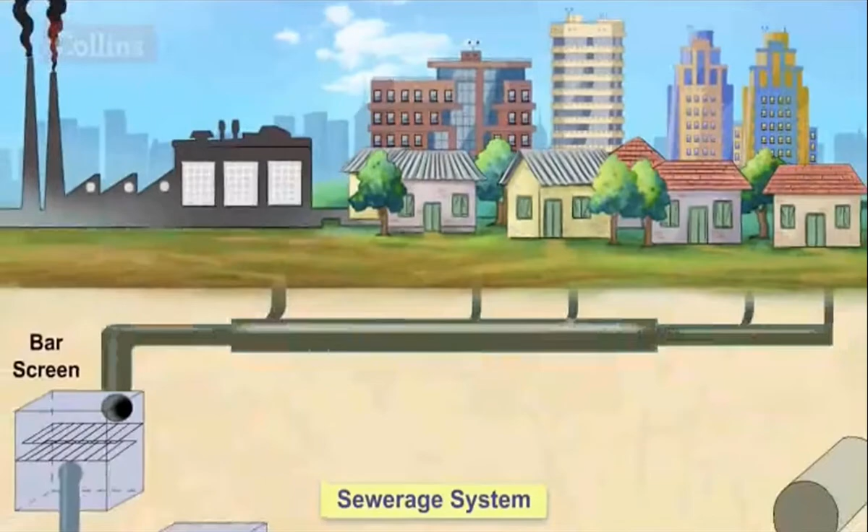Cities and towns have sewerage systems in place to carry wastewater from our homes, hotels, factories, and other establishments to a sewerage treatment plant where the wastewater is treated. It is then deemed safe to release into other water sources. The treatment of wastewater goes through different stages. Wastewater is treated to remove the physical, chemical, and biological contaminants present in it through various processes.

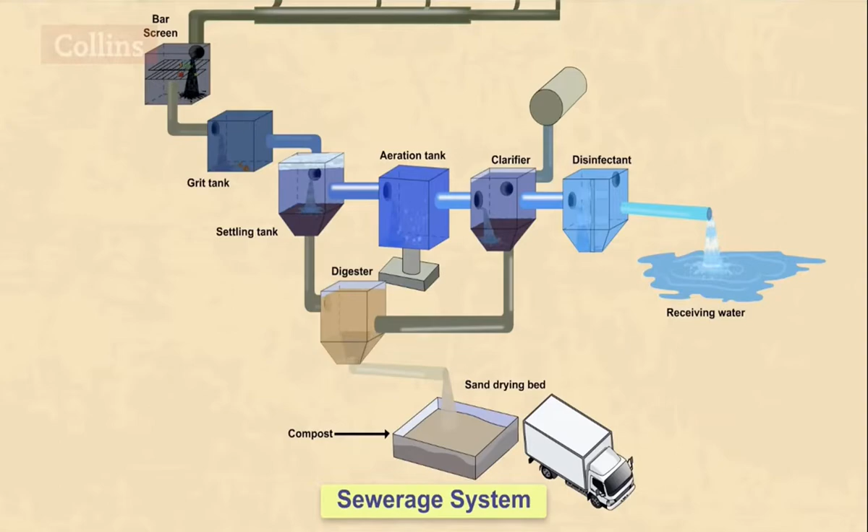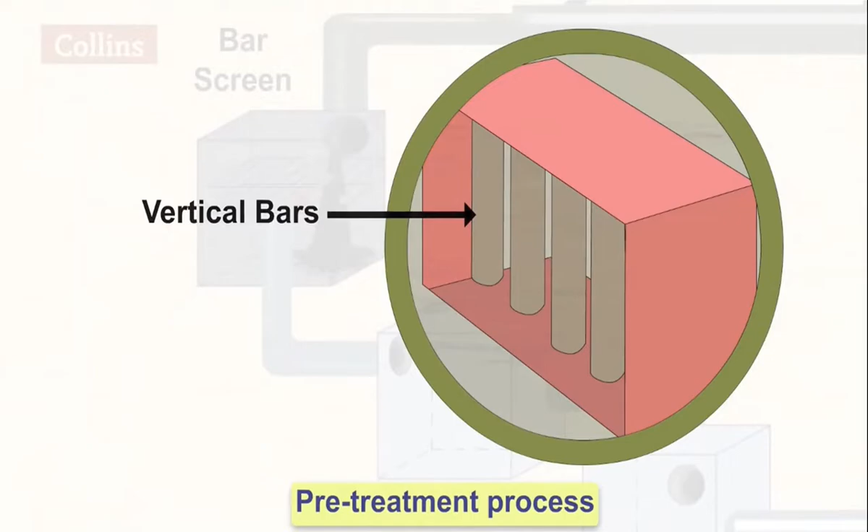The pre-treatment process involves the sewage being sent through grids or vertical bars that can remove large solid substances like metal cans, paper, and plastic materials.

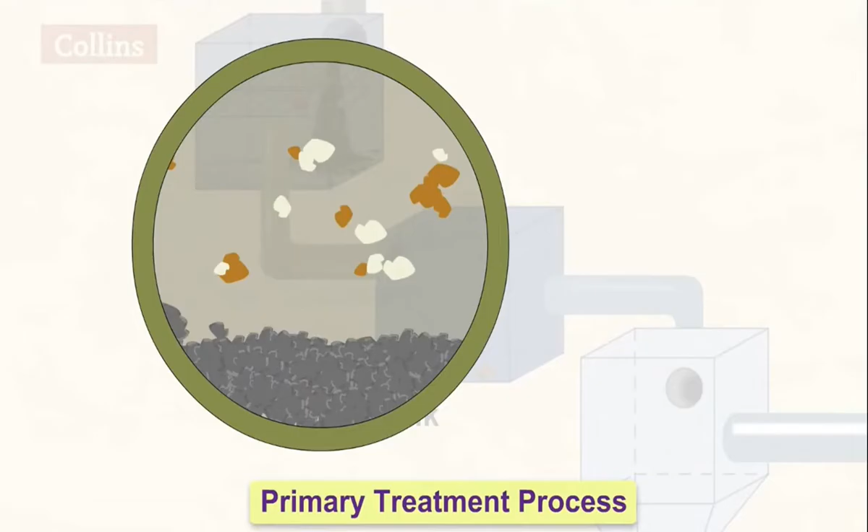In the primary treatment process, the sewage flows through the grit chamber very slowly so that the sand, pebbles, and soil settle down at the bottom. The sewage flows into the settling tank or sedimentation tank, where solid wastes like feces are allowed to settle down. Wastes such as soaps, oils, and grease rise to the top of the wastewater.

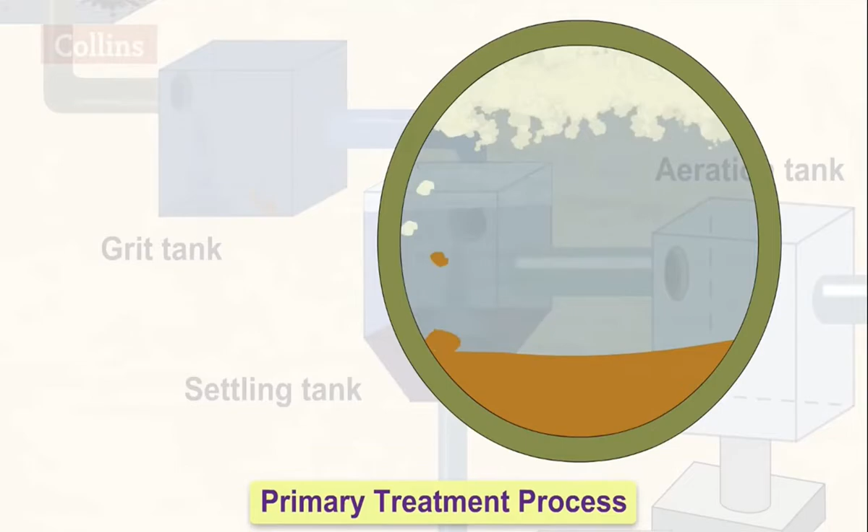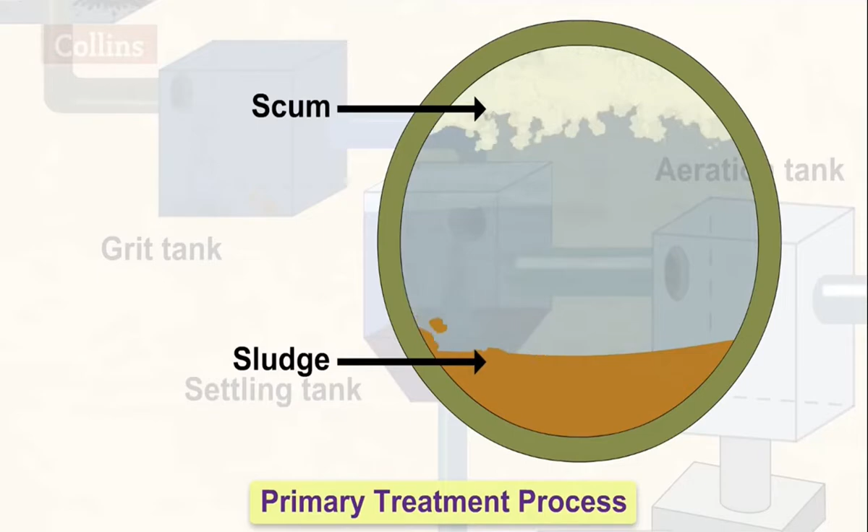The waste material that settles down at the bottom is called the sludge, and the floatable material is called the scum. Scum is then removed using a skimmer, and sludge is removed with a scraper every few days. The water that is left out is called the clarified water.

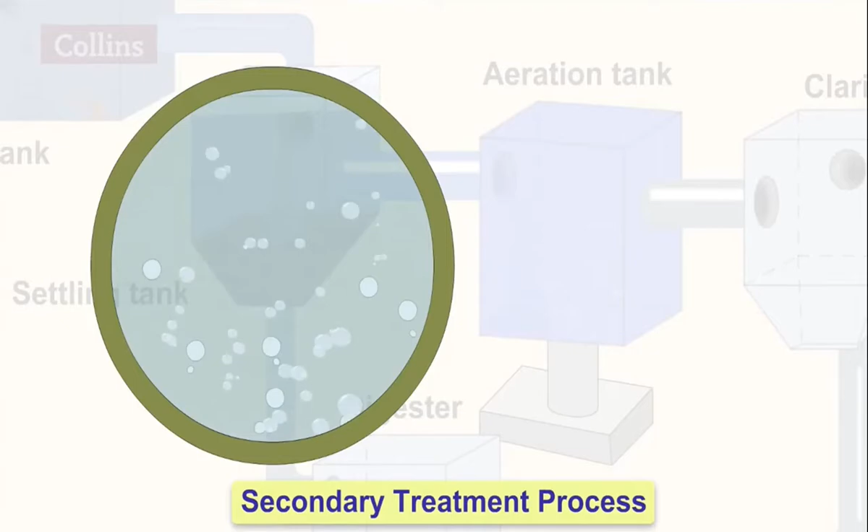In the secondary treatment process, biological or organic wastes are removed. It is a biological process. This is done by transferring the clarified water into an aeration tank, where air blowers bubble air, which helps aerobic bacteria to grow and feed on the organic contaminants, such as food waste, feces, and other organisms.

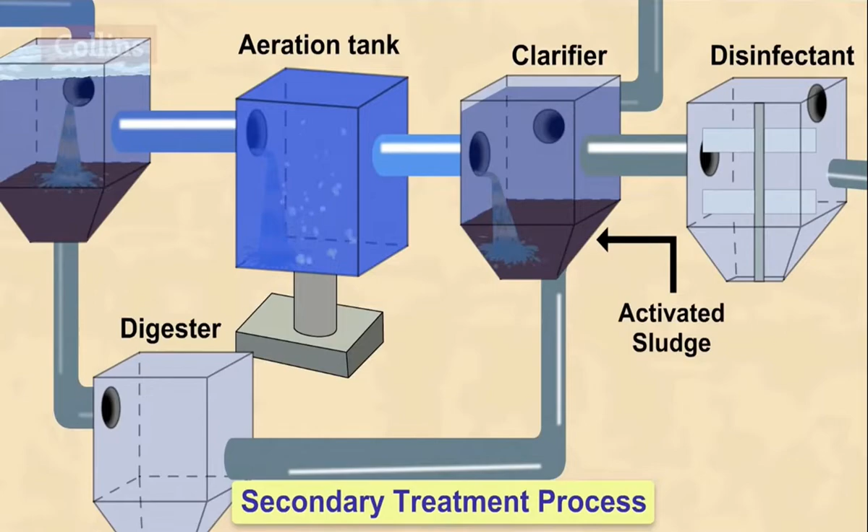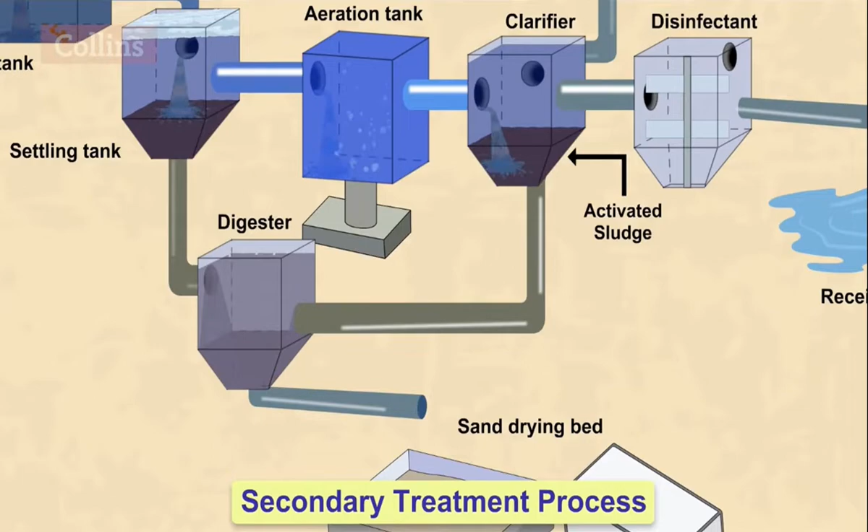The mixture then flows from the aeration tank into the clarifier, where activated sludge settles out by gravity. The activated sludge so produced, along with the sludge produced in the primary process, is transferred to the digester, where it is decomposed by anaerobic bacteria. Biogas is produced in this process, which can be used as fuel or to produce electricity.

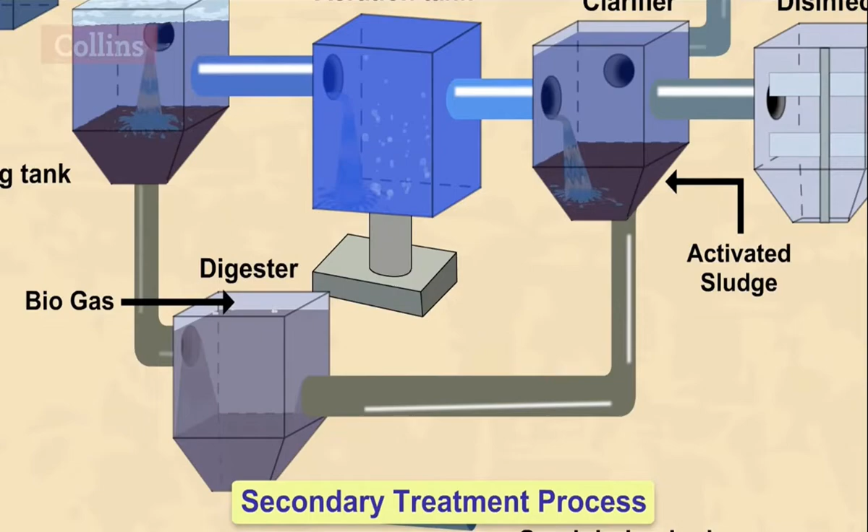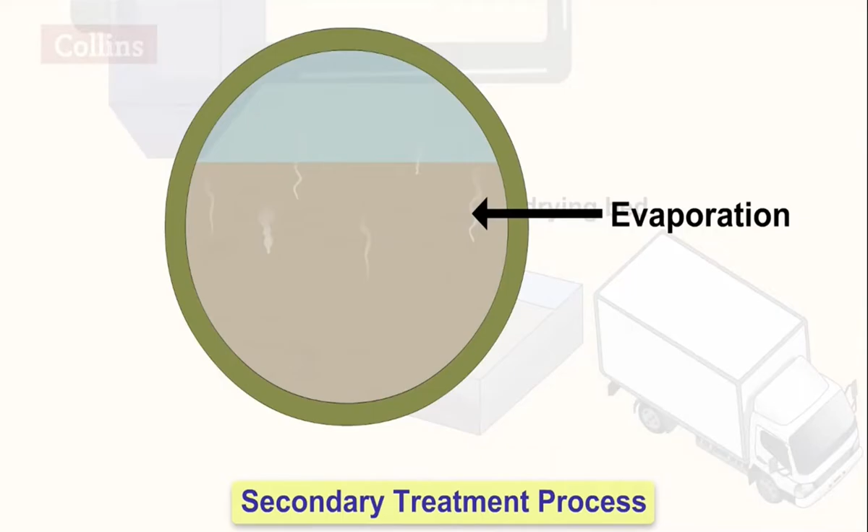The activated sludge is then left in the sand drying beds. Some quantity of water in the activated sludge evaporates, and the remaining quantity drains through the sand beds. This leaves behind the remaining dried sludge, which can be used for making fertilizers or compost.

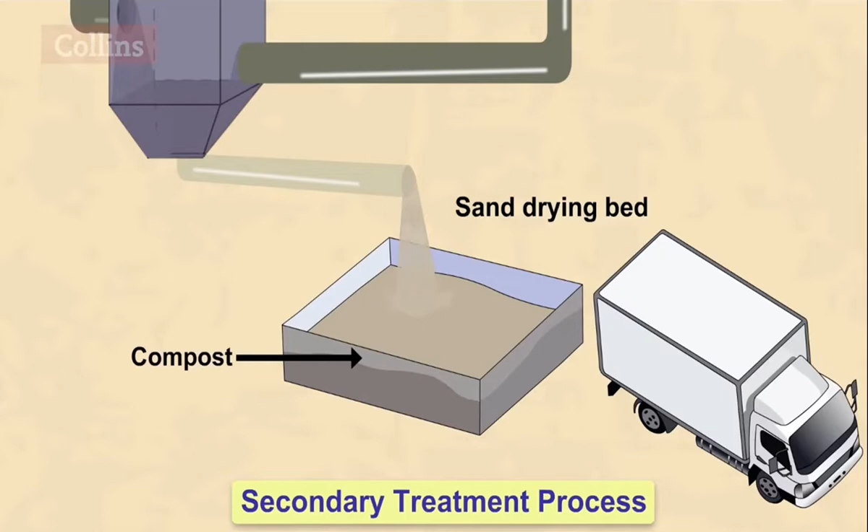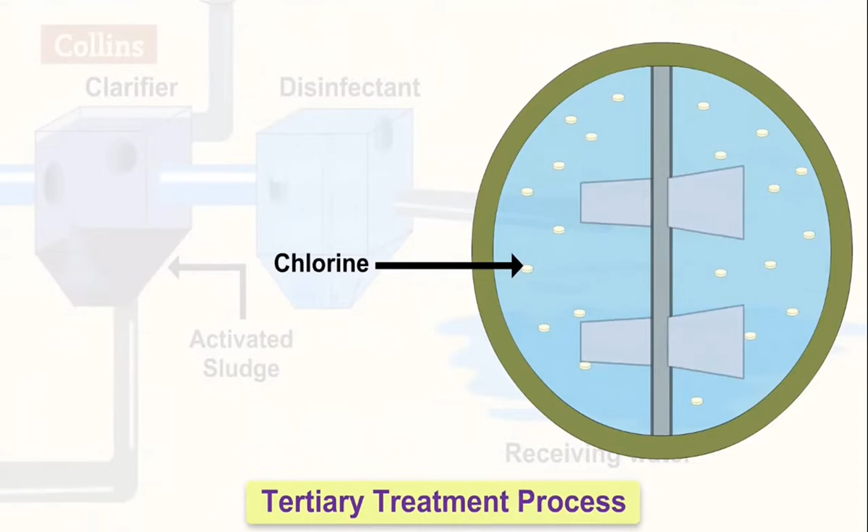In the tertiary treatment process, the leftover wastewater is treated with chlorine to remove the phosphorus compounds, nitrogen compounds, and bacteria. It is a chemical process. Chlorine tablets are added to kill the germs. This process is called chlorination. Then this water is let off into the water bodies.

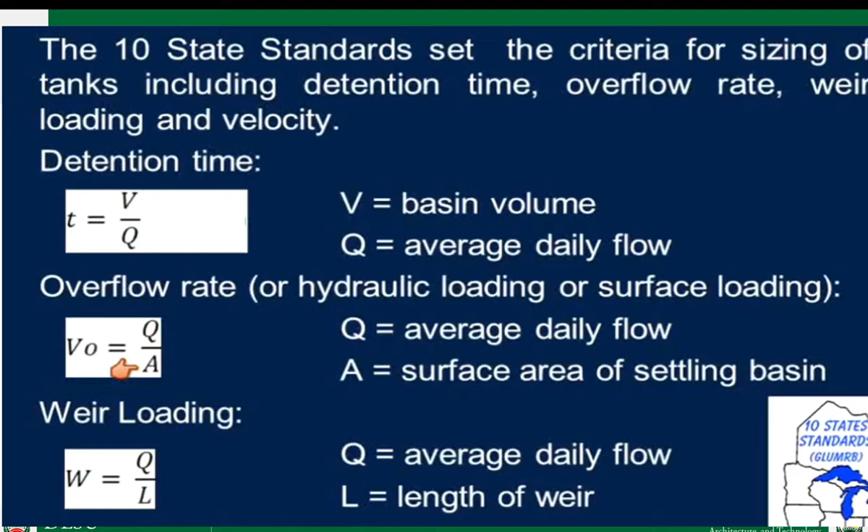And the overflow rate, sometimes the terms get interchanged with hydraulic loading or surface loading, is noted as V sub O equals Q over A, where your Q is the average daily flow and your A is the surface area of the settling basin. And for the weir loading, W equals Q over L, where Q is the average daily flow divided by L, which is the length of the weir.

Is it an example of detention time and hydraulic loading? So the problem states that you're going to calculate the detention time of a tank that is 20 feet in diameter, 10 feet deep, with a flow rate of 50 gallons per minute. And what is the hydraulic loading rate in gallons per day per square foot? So again, we're going to determine the detention time T sub D and the hydraulic loading Q sub O.

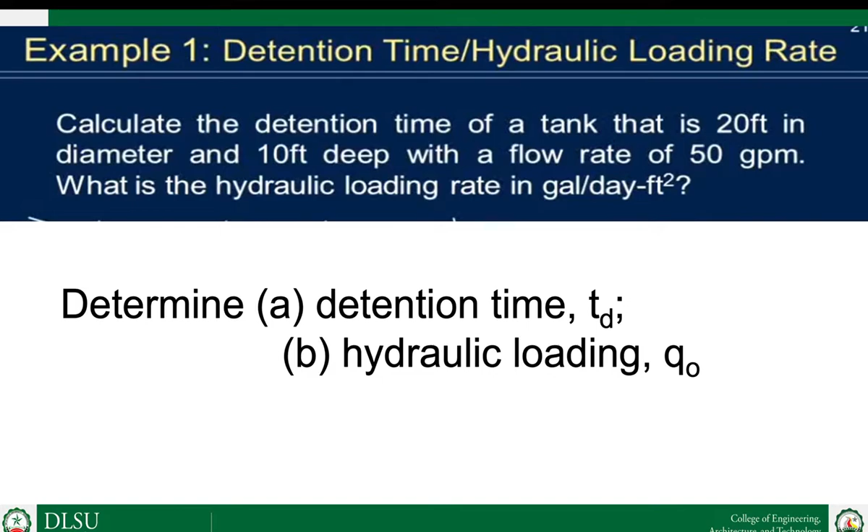So to solve for the detention time, that is equal to T sub D equals to V over Q. So here we have a circular tank. How do we know that it is a circular tank? Because in the problem, as stated, the given is the diameter. So the area of the circular tank is pi r squared.

But we know that the radius is equal to d over 2, so if we square it, r is 20 divided by 2, squared, all over, or equal to pi times 20 feet squared over 4. And we multiply it with the depth of the water or the tank, which is 10 feet. So that is the volume of the tank.

Divided by the flow rate, 50 gallons per minute. So we need to convert the numerator from feet cubed to gallons. 1 cubic foot is equal to 7.48 gallons, so we can cancel out the gallon unit in the numerator with the gallon unit in the denominator. We also convert the unit of time, 60 minutes per hour, so that our final answer will be 7.8 hours.

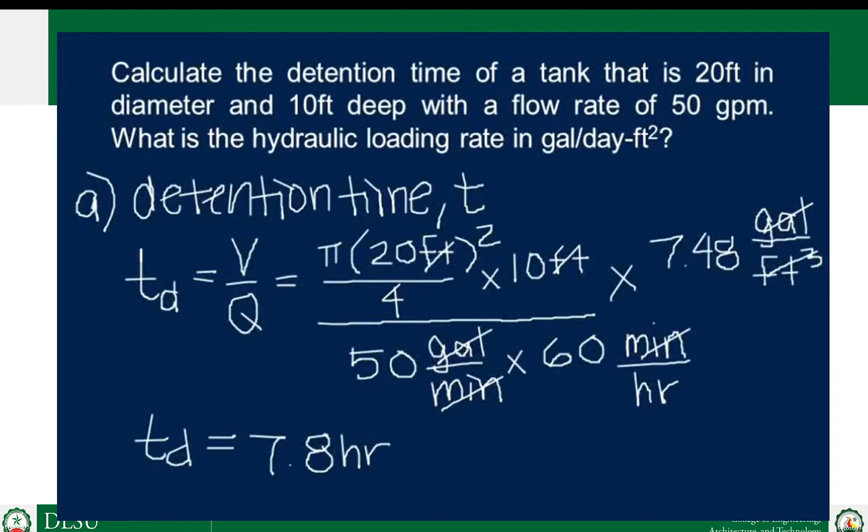And for the hydraulic loading rate, Q sub O equals Q over A, equals 50 gallons per minute. Again, we convert into the unit of day for the time, since that is what is asked in the problem. So this is the conversion: 60 minutes per hour times 24 hours per day. Cancel out minutes, cancel out hours.

So what is left is gallon per day, divided by the area, so pi d squared over 2 squared. So we arrive at Q sub O equals 229 gallons per day per feet squared.

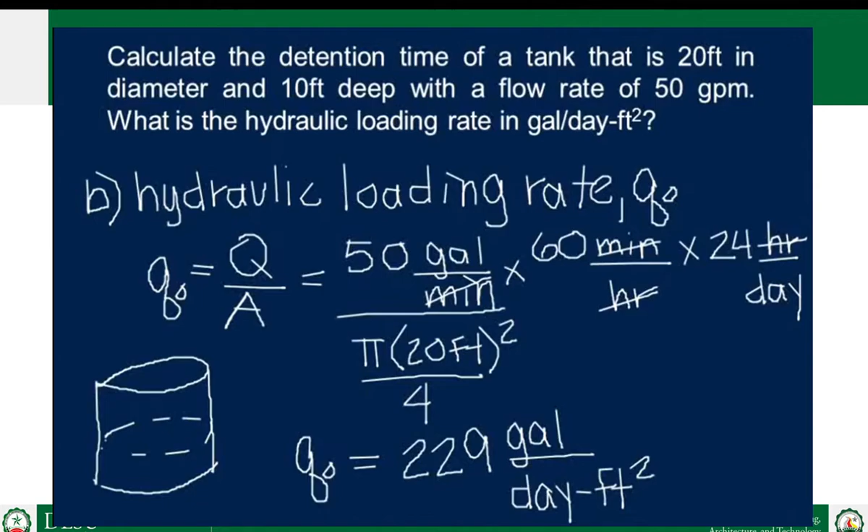So another problem with regard to sedimentation. The sedimentation portion of the inline treatment plant is to be designed. The proposed design for the sedimentation tank is 140 feet wide, 280 feet long, and 17 feet in depth. The length of the effluent weir along the 4 channels at the end of the tank is 1,260 feet. Calculate the major parameters used in sizing this unit based on the design flow of 40 million gallons per day.

So again, what is asked in the problem is the detention time, overflow rate or the velocity of the effluent water, and the weir loading and the overflow rate.

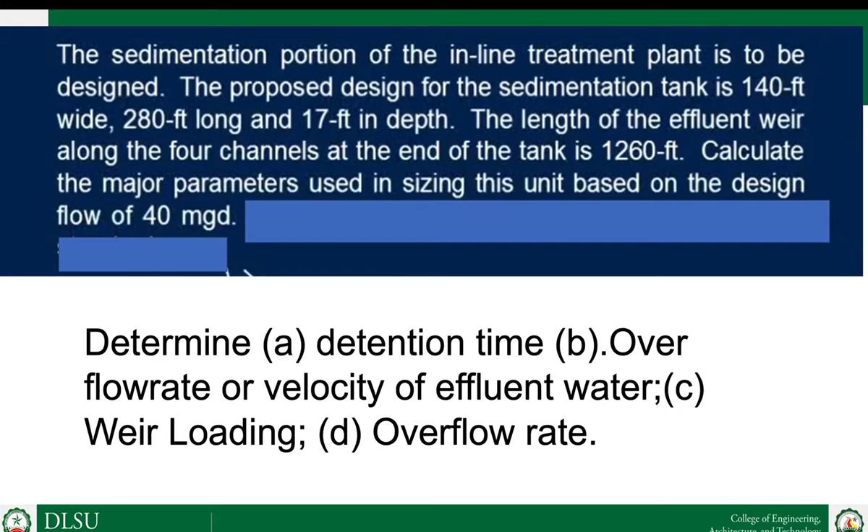So to solve for the detention time, that is equal to V over Q. It's very obvious stated in the problem that the tank is rectangular, since the given dimensions are the wide, long, and depth of the tank. So we multiply 140 feet times 280 feet times 17 feet, all over, divided by Q, which is equal to 40 million gallons per day.

And we convert million gallons to cubic feet, so we multiply the denominator by 1 CFS, or cubic feet per second, divided by 0.6463 million gallons per day. This is the conversion unit. And we arrive at an answer of 10,767 seconds, or in minutes, 180 minutes.

Okay, so for letter B, for the velocity, V is equal to Q over A. Q here is 61.9 cubic feet per second. How do we arrive at this? We arrive at this by 40 mgd multiplied by 1 CFS all over 0.6463 mgd. If we execute this, this is equivalent to 61.9 cubic feet per second, divided by the area.

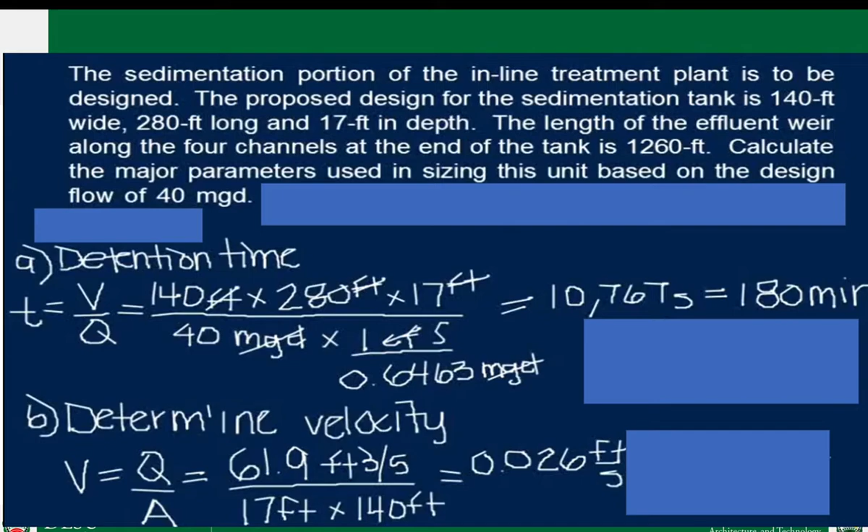And for the weir loading, it is equal to Q over L. It is given that the flow rate is 40 million gallons per day, divided by 1,260 feet. So that is equivalent to 31,746 gallons per day per foot.

And for the overflow rate, that is equal to V sub O equals Q over A. 40 million gallons per day divided by the area, by which we use the 140 feet wide multiplied by the 280 feet long. And that is equivalent to 1,020 gallons per day per feet squared.

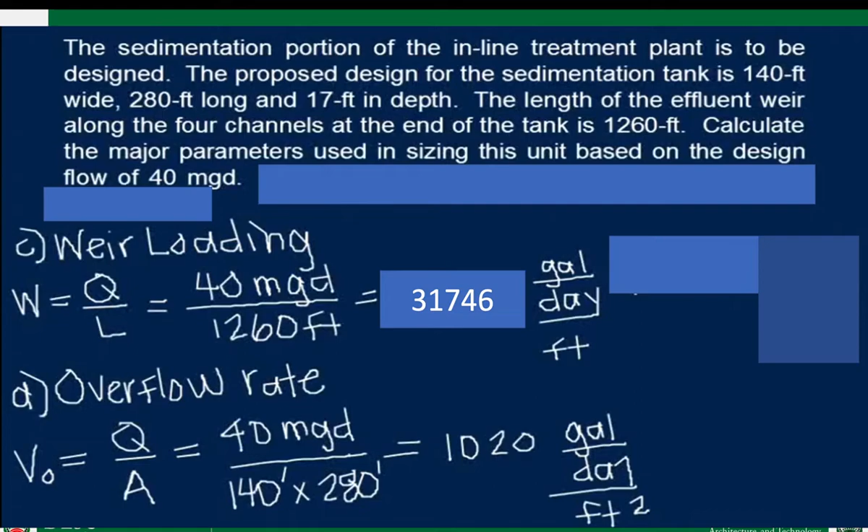Rapid mixing occurs in the coagulation or flocculation tank. You need to disperse chemicals in the tank so that there will be reaction between the coagulant, flocculant, and the suspended particles present in the water. In this way, they will form floc or clump together, becoming bigger and denser than water, and they will settle down.

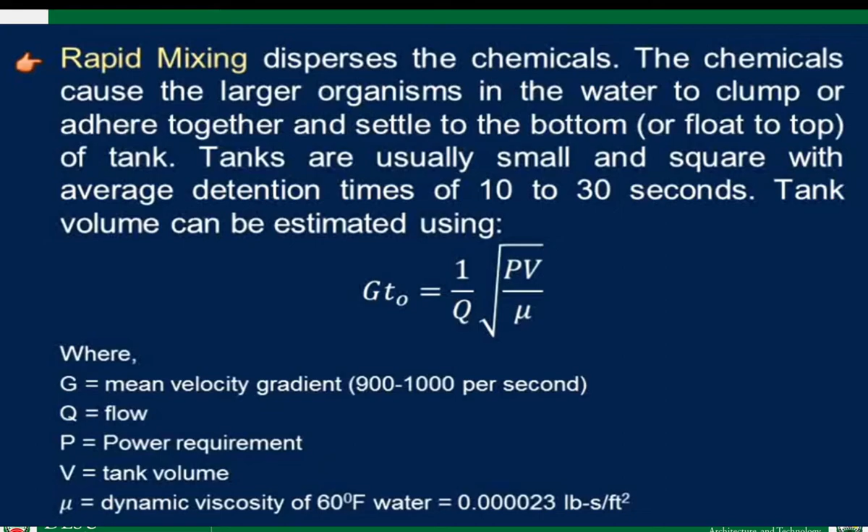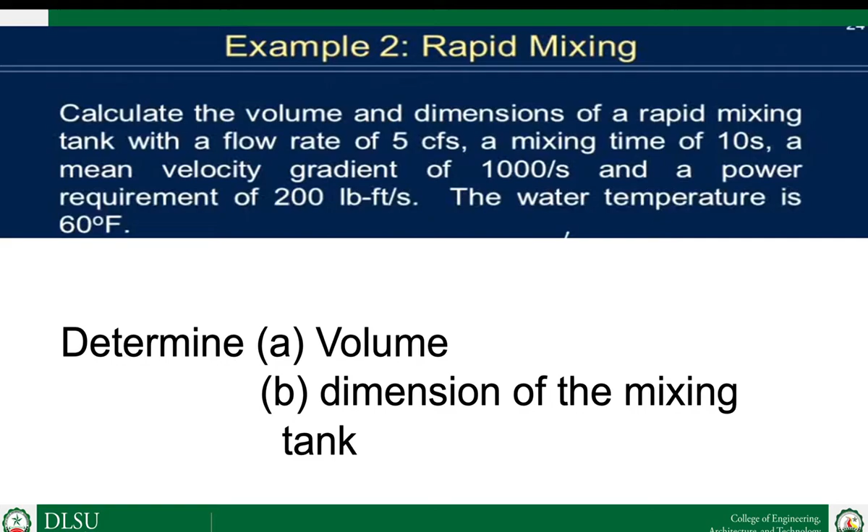For this example on rapid mixing, we're going to calculate the volume and dimension of a rapid mixing tank with a flow rate of 5 cubic feet per second and a mixing time of 10 seconds, a mean velocity gradient of 1000 per second, and a power requirement of 200 pound-feet per second. The water temperature is 60 degrees Fahrenheit. So what is required in the problem is the volume and the dimension of the mixing tank.

For this example about rapid mixing, we're going to calculate the volume and dimension of a rapid mixing tank with a flow rate of 5 cubic feet per second, or CFS, a mixing time of 10 seconds, a mean velocity gradient of 1000 per second, and a power requirement of 200 pound-feet per second. The water temperature is 60 degrees Fahrenheit.

To compute for the volume, we are going to use this equation: G times T sub O equals 1 over Q, square root of PV over mu. So your G is 1000 per second, your T sub O, the mixing time, is 10 seconds, and your Q, the average daily flow, is 5 cubic feet per second. Square root of the power, 200 pound-feet per second, and your volume here is the unknown, all over the viscosity of water at 60°F.

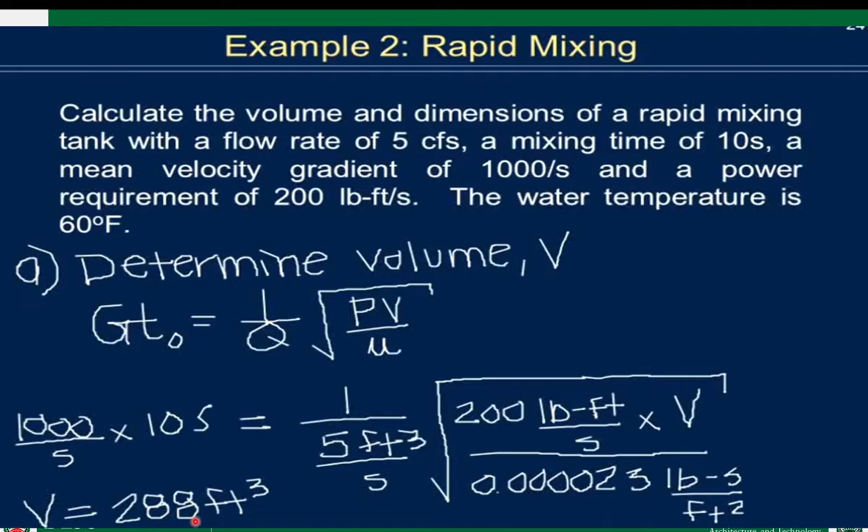So by algebra, we can extract the value of V, which equals 288 cubic feet.

To calculate the dimension of the tank, we have computed that the volume is 288 cubic feet. Since this is a rectangular tank, we're going to find the cube root so that we can solve for the dimension of the tank. If we set the dimension of the tank to be a whole number, we round up, so that is 7 times 7 times 7 feet, which is 343 cubic feet, larger than 288. So we'll adjust again.

By using 7 feet times 7 feet times 6 feet, we arrive at a maximum of 294 cubic feet, which is higher than 288 cubic feet. So by estimation, we can conclude that this is the dimension of the rectangular tank.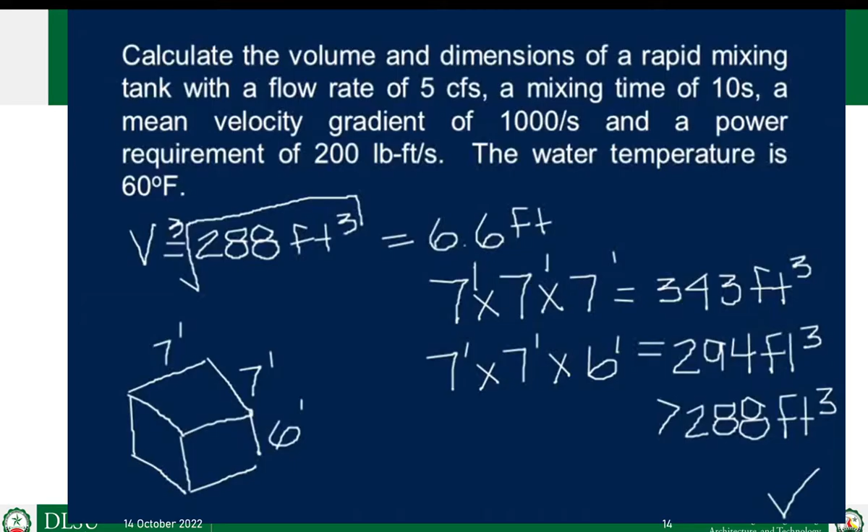For the flocculation tank, our next example: determine the volume and depth of a circular flocculation tank that is 10 feet in diameter, needed for highly turbid water that has an average flow of 1,000 gallons per minute, a velocity gradient of 100 per second, and a GTO of 120,000 seconds per second. Again, the unknowns are the detention time, the volume of the flocculation tank, and the depth of the water, D.

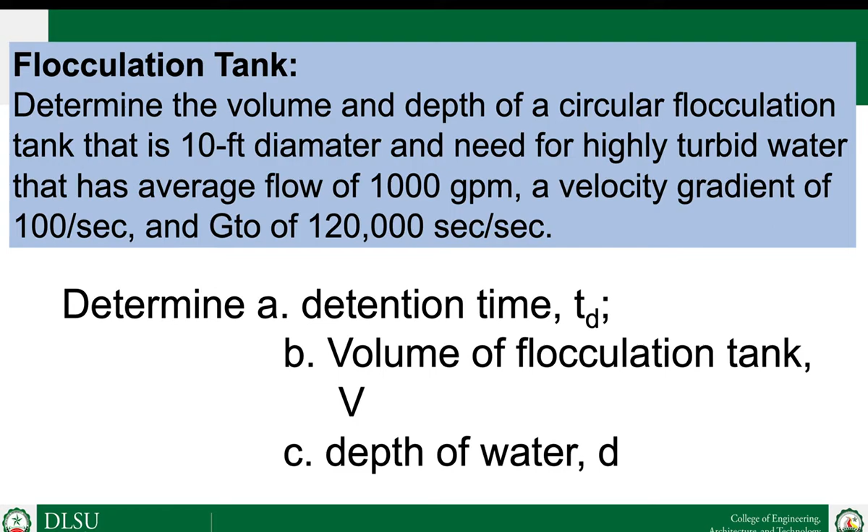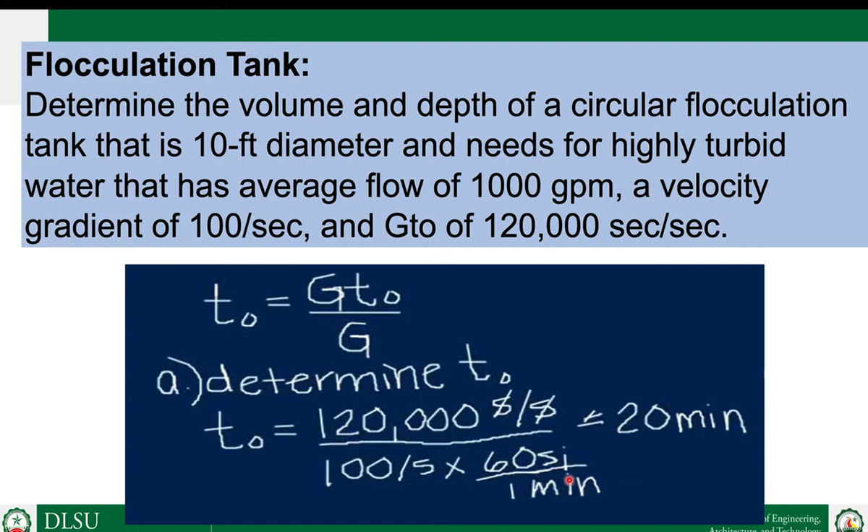To solve for the flocculation time, T sub O equals GTO over G. So GTO is given as 120,000 seconds per second, over your G, which is 100 per second. We convert the unit of time to minutes, and we arrive at 20 minutes for the flocculation time.

To solve for the volume of the tank, we use the equation V equals QT. Your Q is the average daily flow, 1,000 gallons per minute, multiplied by the time we solved previously, 20 minutes. We convert the gallon unit to cubic feet by dividing by 7.48 gallons per cubic foot, and we arrive at a volume of 2,674 cubic feet.

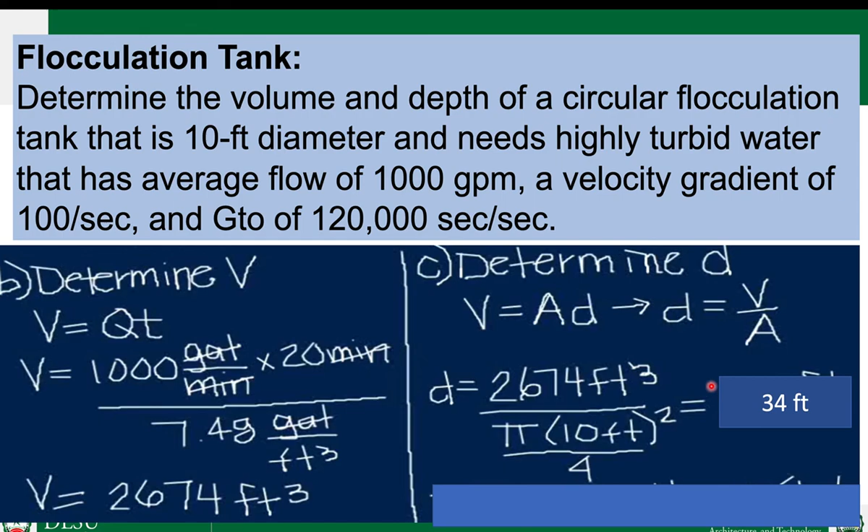For letter C, we're going to find the depth of the tank. The volume equals area times D, the depth of the tank. So your D equals V over A. So the volume, 2,674 cubic feet, divided by pi D squared over 4, gives us 34 feet as the final answer.